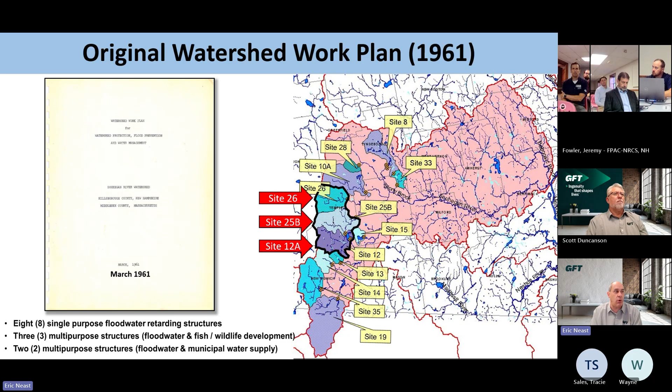Many of these were single purpose dams, meaning they're solely for flood control. But some of the dams have dual purposes, which is both flood control and either wildlife development, or in the case of Site 12A, they also provide that water supply component. If we zoom in a little more, you can see the dams are in the upper end of the watershed, which is typical for NRCS dams.

If we zoom in a bit more on these areas, you get a better sense for where they're located, and maybe located relative to those of you on the call here. All three dams are located in and around the town of Temple, and they're all north of the town of Greenville and east of Route 45.

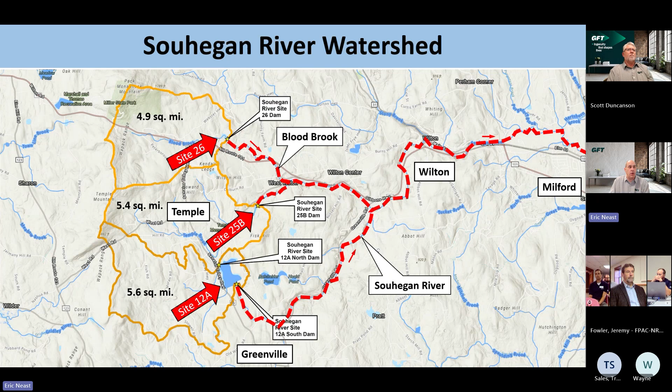These dams are reducing peak flow rates along these reaches of the Souhegan River, so they're providing a great service to the community. Now with that, though, also comes risk, because these dams are sitting there full of water. In the unlikely event that one or more of these dams would fail, there's the potential that the flood wave released from these dams could impact numerous homes and businesses.

With that analysis, this dam then becomes classified as a high hazard dam. Now, the phrase high hazard doesn't mean that the dam is in poor condition. In fact, these dams are very well maintained. The classification of high hazard is solely related to what are the consequences if it were to fail.

And I think this further bolsters my initial comment that public safety is one of the most important parts of this study, because what we're proposing here is to bring these dams into compliance with current dam safety standards, which should reduce the possibility of a dam failure. So I think that's an important thing to realize about what we're trying to accomplish here.

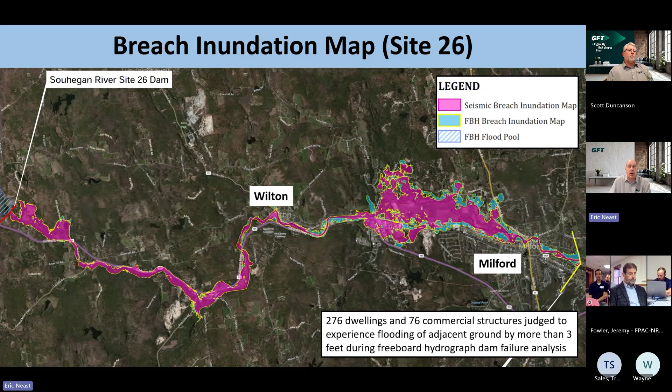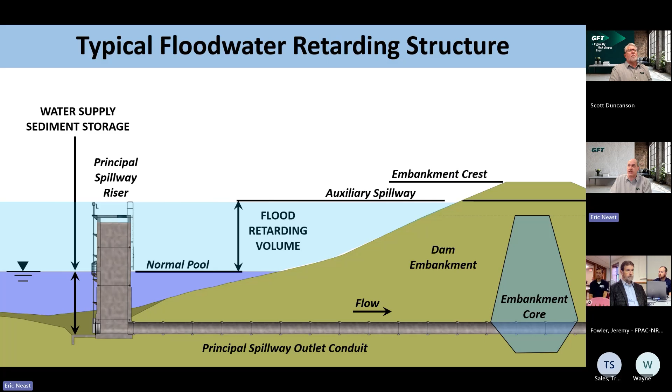So that gives you a little overview of how a typical NRCS dam functions. Next, I'd just like to give you an overview of the dams that we're talking about here today. Just give you a little virtual tour.

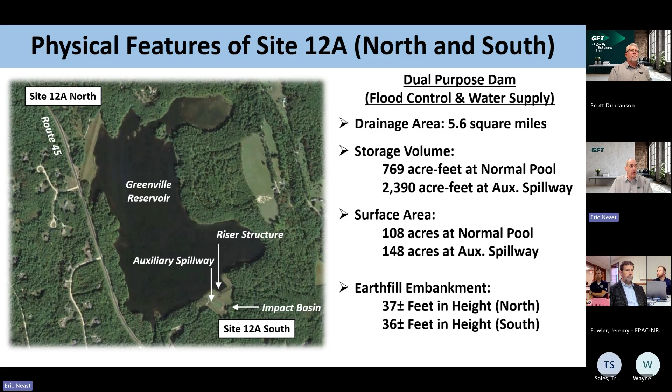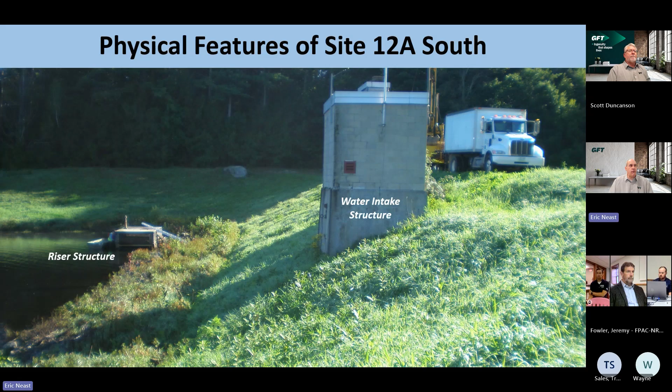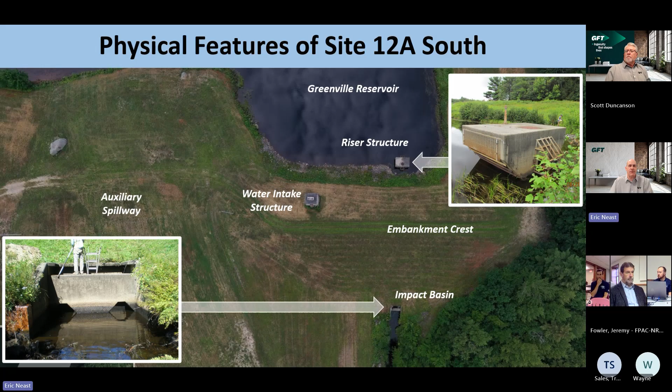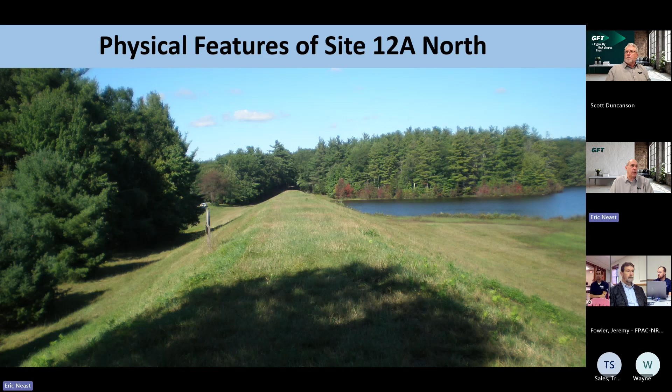Here's an aerial view of this. There is a low-level outlet at this dam that's not used very frequently, but there's the ability to open a valve and activate this low-level pipe if needed, which is the middle pipe in this photo in the bottom left of the screen. You can see Route 45 coming along the bottom right corner of the screen. So that gives you a sense of what the north embankment looks like.

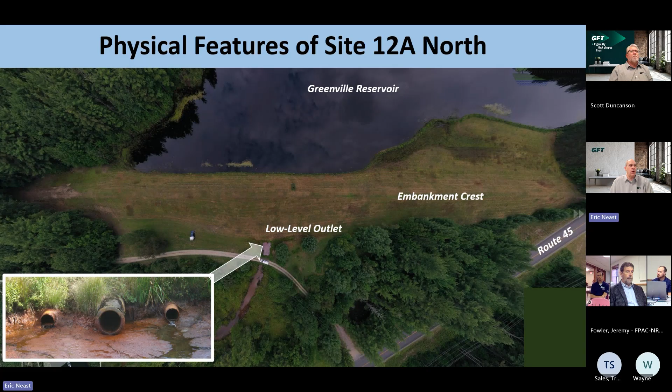If we move over to site 25B, this dam is a little taller, about 64 feet in height, but basically constructed the same way. It's an earth embankment with a riser structure at the upstream toe of the dam, and a pipe that runs through the embankment and discharges into a plunge pool at the downstream toe. Again here, the auxiliary spillway is at the right abutment of the dam.

Again, just an aerial view of Site 25B looking straight down from above. Shows a lot of the same things we just looked at in the last two slides, but this image does show another view of the riser structure and what the outfall of the principal spillway conduit looks like there, where it discharges into the plunge pool.

That plunge pool is there to dissipate energy coming out of the principal spillway conduit, so that when the flow enters the natural stream channel, it's moving at non-erosive velocities.

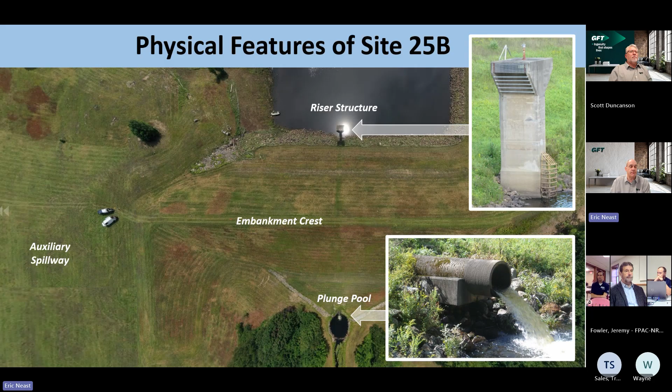Site 26 again looks an awful lot like Site 25B. We have an earthen embankment with a riser structure and a principal spillway pipe that discharges into a plunge pool. The one difference here is that the auxiliary spillway is actually tucked off to the right side of the reservoir. It's not immediately adjacent to the earthen embankment, and I have that labeled here.

I guess the other thing to note is this is the tallest of the dams that we're looking at today. This embankment is about 76 feet in height.

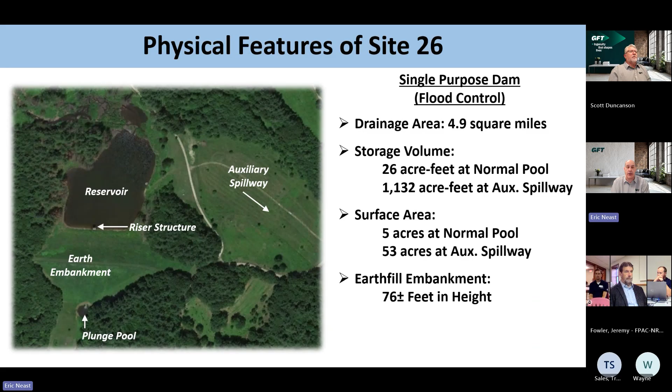Just a view of what that dam looks like from standing on the ground. You're standing at the right abutment of the dam, near the crest of the dam, looking upstream at the reservoir. You can see the riser structure, and that clearing in the background is where the auxiliary spillway channel starts.

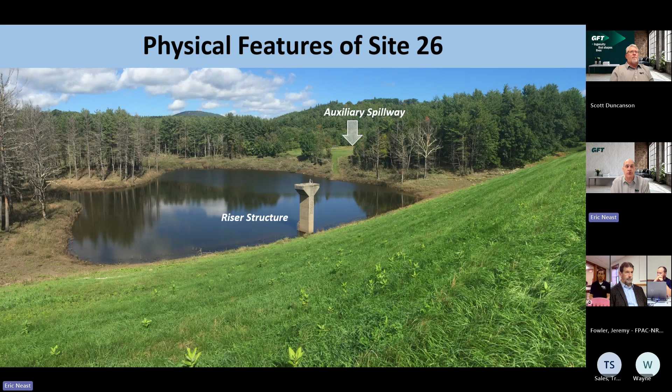And again, another aerial view, just looking straight down at the dam embankment. Another view of the riser and that principal spillway discharging into the plunge pool.

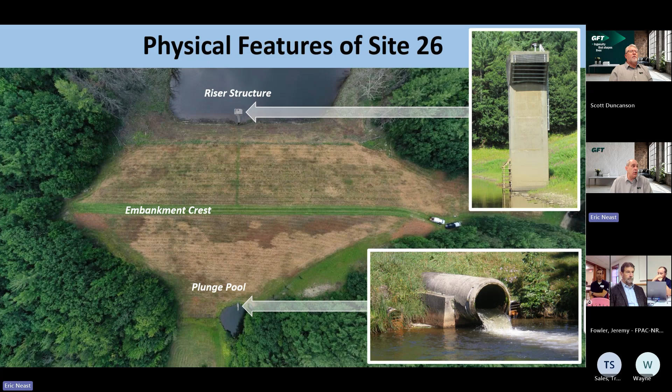So with that, hopefully you have a little better sense of what these dams look like and how big they are. And with that, I'm going to move into what are the deficiencies that we noted with these dams.

Again, I point out that these dams are not in poor condition. It's just that the regulations we need to comply with today have changed since these dams were built. We identified basically 4 deficiencies that are the same for each dam.

Each dam has inadequate conveyance capacity, meaning it's at risk of being overtopped during large storm events. Each dam has auxiliary spillway integrity concerns, meaning the auxiliary spillway is at risk of erosion during those large storm events that activate it.

And then there are concerns with the internal seepage collection and conveyance system and the materials used to construct that system, which may not be compatible with the earth embankment material around them. I'll talk about all of these in much greater detail as we move forward here.

The last concern is that these embankments did not meet the minimum factors of safety that NRCS requires. That does not mean the embankments are not stable, it's just that they do not meet these minimum factors of safety imposed by the various regulatory agencies.

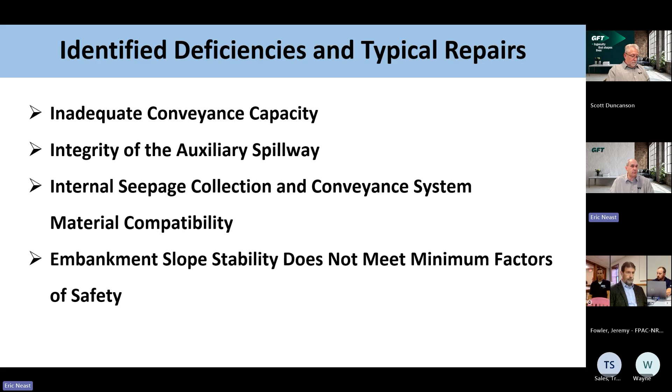So why do we concern ourselves about these? It's interesting, NRCS did a study back in 1983, and this is a little dated now, but it gets the point across. The deficiencies we identified with these dams are probably the top 3 reasons why dams fail, according to this study from 1983.

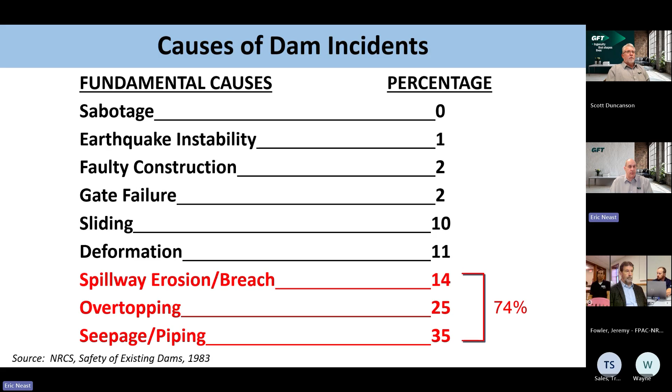We have spillway erosion, embankment overtopping, and seepage and piping concerns, which is that toe drain concern I mentioned earlier. These 3 items added up to 74% of the known dam safety incidents recorded by NRCS back in 1983. So these are well-documented failure modes for earth embankment dams, and it's important that we address these.

Embankment overtopping, probably one of the biggest concerns a dam owner has to deal with. This is a picture of an earth embankment dam being overtopped. Under this situation, the only protection this dam has against failure is the vegetative grass cover on the downstream face of the dam.

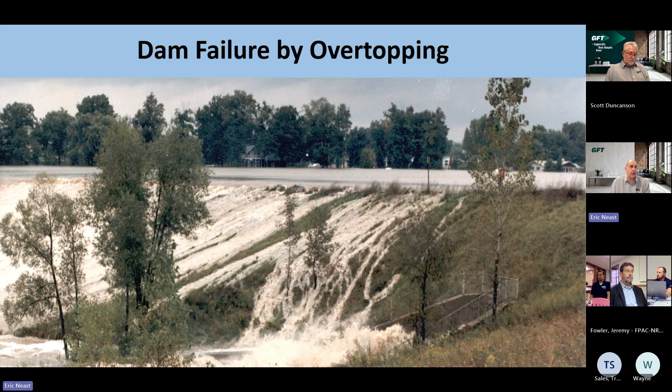While that can be effective under maybe really shallow flows and short durations of overtopping, grass just cannot stand up to long durations of overtopping and high depths of overtopping. The likely outcome of something like this would be a failure of the dam, and that's what happened to that dam I showed you on the picture prior. It actually failed, and the contents of the reservoir were released uncontrolled, causing flooding downstream. So failure by overtopping is a concern.

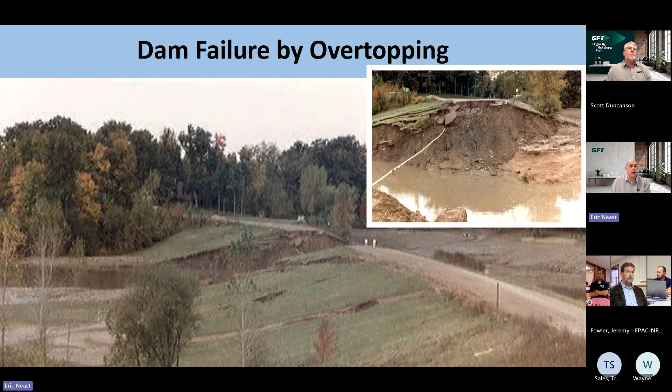ASDSO actually put out a little video of dam overtopping. It's a little cartoonish, but it gets the point across, and I want to show that here next.

I think you might have to reshare with the audio enabled, Eric. Is this not coming through? Not hearing the audio, no. Ah.

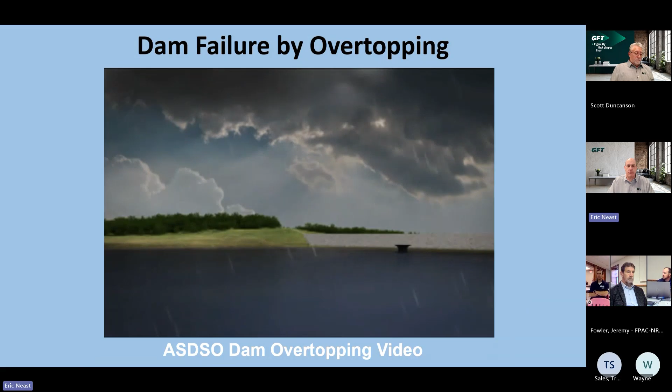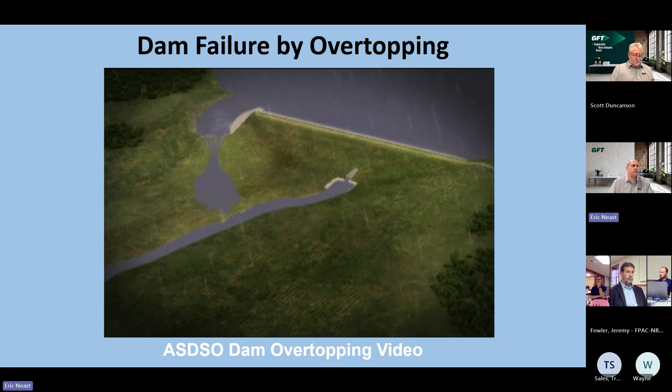Dams are designed to store runoff resulting from heavy rain. When storage has reached a specific limit, spillways are designed to pass the excess floodwaters, initially through a primary spillway. Many dams are equipped with an emergency spillway to help pass large flood inflows which exceed the capacity of the primary spillway. In an extreme flood, flows can exceed the combined spillway capacity, spill over the top of the dam, and create a very dangerous situation.

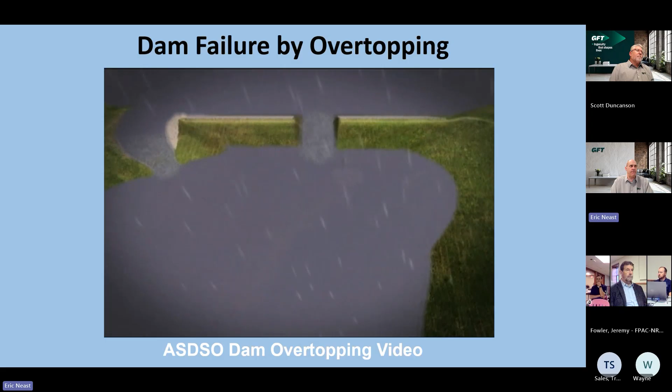Overtopping flood flows can rapidly erode down into an earthen embankment dam, leading to an uncontrolled release of the stored waters and causing catastrophic flooding downstream.

Okay, that was a good little video. So what can we do to increase conveyance capacities at dams? I'm showing you here in the bottom left corner of the screen the Weir equation, and this is your one engineering lesson of the day.

This Weir equation is everything you need to know about increasing conveyance capacity at dams. It involves a factor called Q, the flow you can get through the spillway, a Weir coefficient, which is the C value, the length of the weir, the L value, and the height of the weir, the H value.

The image in the background is actually the auxiliary spillway of site 12A, looking upstream. I have the length and the H shown in this photo. Those are the two values we can play with in the Weir equation to increase conveyance capacity. So if you increase the length of the spillway or the height of the spillway, you can pass more water through it.

We're actually going to do this at both sites 25B and site 26. We're going to slightly increase the top elevation of the dam so that it is not overtopped during these large storm events.

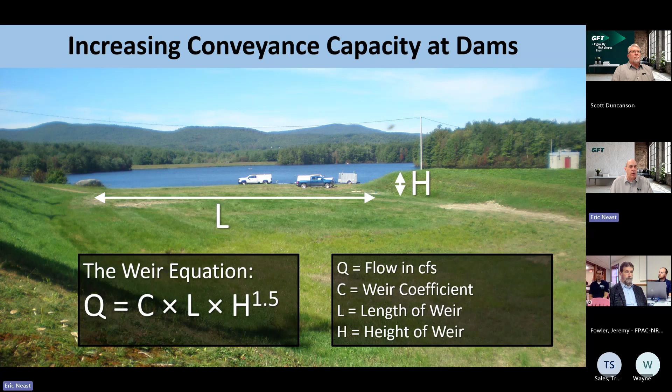Now, if there are restrictions that prevent you from either widening or deepening the spillway, there are other things we can do. This is a project at Rawson Dam in Massachusetts, where the dam owner decided to simply armor the downstream face of the dam with a non-erodible material.

All this concrete you see in the foreground is armoring that was placed on the downstream face of the dam. It creates a shell over the embankment so that when the dam is overtopped, the embankment does not erode, and you don't have that risk of an uncontrolled release of the contents of the reservoir.

This is actually what we're proposing at site 12A South, and I'll get into that in a few more slides. So those are some of our options for increasing conveyance capacity.

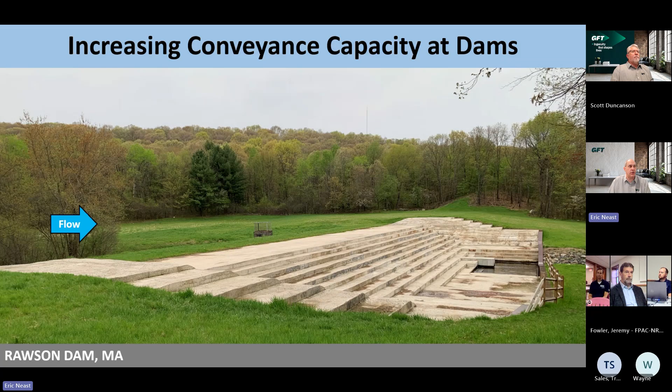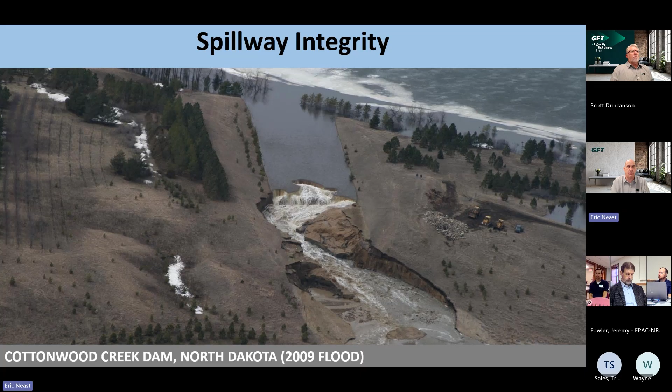If this erosion had been allowed to continue, you would have had a failure of this dam through the auxiliary spillway. To give you a sense of this, here's another photo of that same erosion. That is a 40-foot wall created by the water eroding away the spillway. You can imagine if that erosion was allowed to continue upstream, you would have released a 40-foot wall of water out of the reservoir.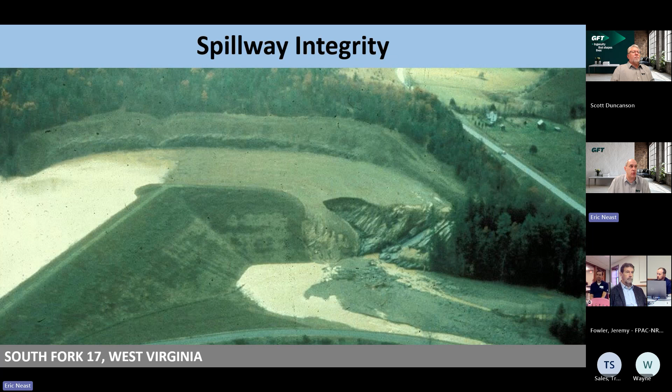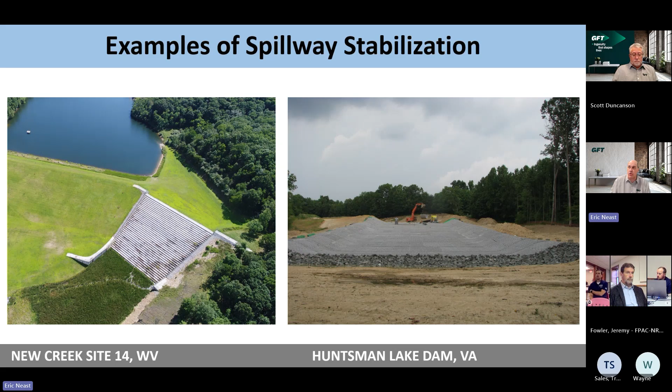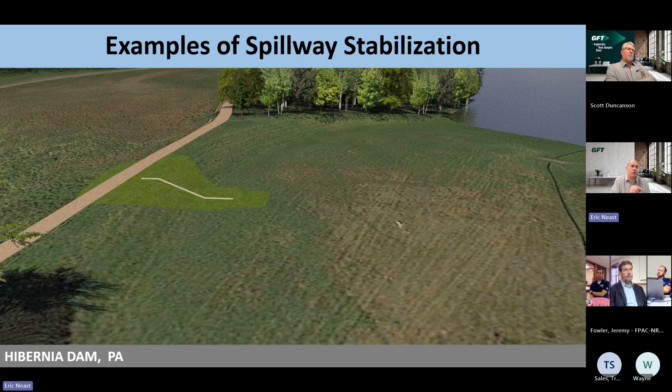And we're actually proposing this concept for site 25B, only the wall will extend across the entire width of the spillway.

Another option, instead of building out of conventional concrete like a concrete wall, you could use roller compacted concrete to create this cutoff wall. Roller compacted concrete is a pretty unique form of concrete - it's very stiff, and once you place it, you can immediately put a roller on it and compact it. So it's not there to be an impervious barrier; it's there to be a structural impediment to this erosion that's moving upstream.

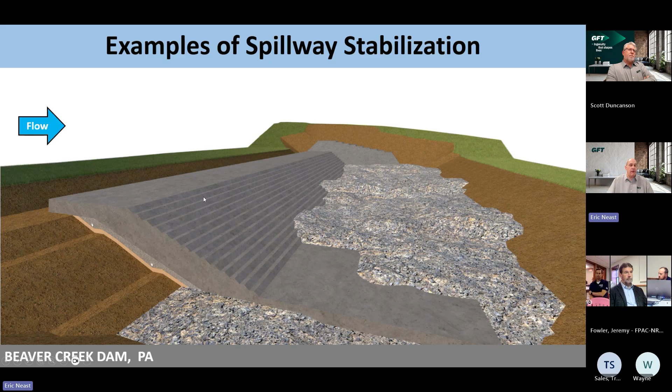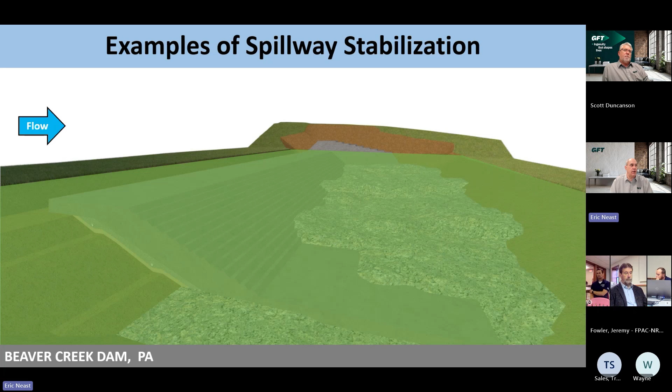So in this artist rendering, imagine you've dug a hole in the middle of the auxiliary spillway and excavated down to the rock, and now you're building back up with this roller compacted concrete material. Eventually all of this will get filled over with soil and seeded, and you wouldn't even know it was there. However, if this spillway would ever start to erode from the downstream side, off the right of this screen, that erosion, when it hit this RCC mass, would stop, and the integrity of the dam would be maintained. We're actually proposing this concept at site 26, in the auxiliary spillway.

The toe drain is probably one of the more important components of this design. It serves a very important purpose: when we have an earth embankment dam impounding water, that water wants to move downstream. It wants to move through this earthen mass, and it will - you will get seepage through this embankment.

As that water moves through the embankment, it creates what we call the phreatic line. Above the phreatic line, the soils are dry, and below it, the soils are wet. With any good dam design, we want to maximize the dry soils and minimize the wet soils, because dry soils have more strength than wet soils. That toe drain helps keep the phreatic line as low as possible in the embankment.

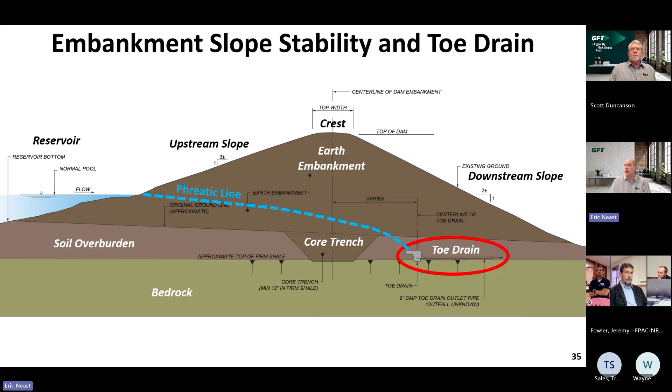And if those particles get into the drain pipe, they can be carried away and removed from the dam entirely. And that's not what we want, because those particles are supposed to be in the dam. And now that they're not, we are creating voids in the dam. If this situation is allowed to occur long enough, you can create a situation we call piping, where you can actually erode a hole through the embankment without even knowing it. So having a properly designed toe drain is important.

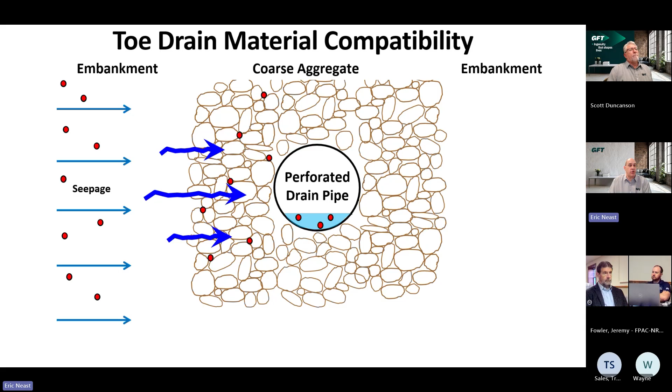Now, under today's standards, we typically require what we call a dual aggregate toe drain. And that is very similar to what was constructed in the 1960s. We still have the perforated pipe and the coarse aggregate around the pipe, but now we add a sand filter, a very fine material around the coarse aggregate that separates the embankment material from that coarse aggregate.

And with this, that sand is designed so that those little particles that the seepage is carrying with it do not make their way through the sand. But here, all those particles are captured by the sand so that they remain inside the dam embankment where they belong.

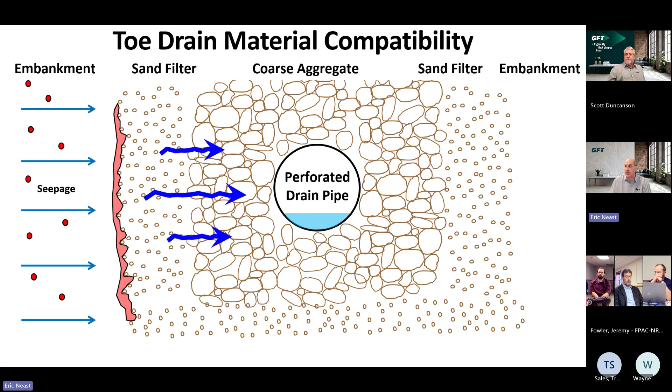And this is a situation that we need to resolve here at all three of these dams. These dams have the old style toe drain, and we need to bring them up to current design standards. That can be done by simply abandoning the old toe drain and then adding a new dual aggregate toe drain at the downstream toe of the dam. And that's what you kind of see here on this screen.

So in doing so, we solve two problems. We solve the material compatibility of the toe drain, and we also solve the factor of safety issue with the downstream embankment slope.

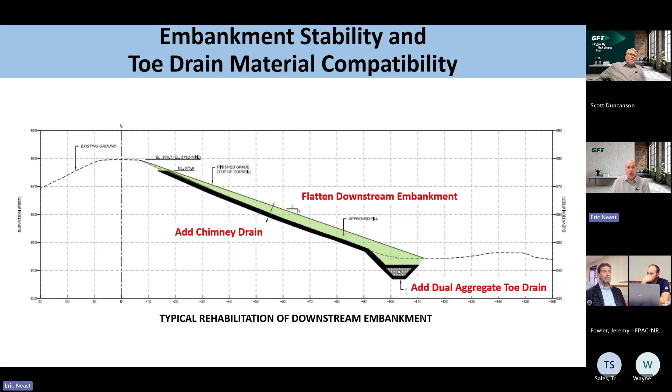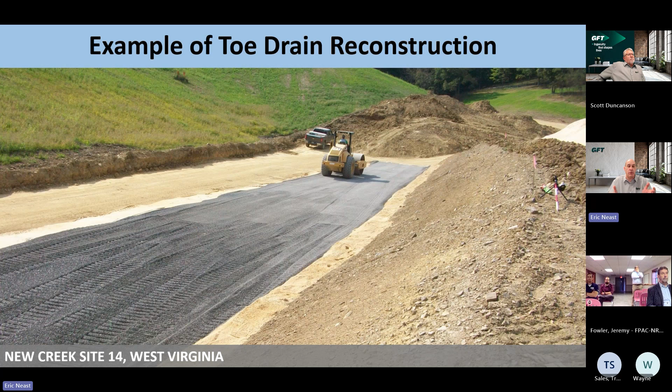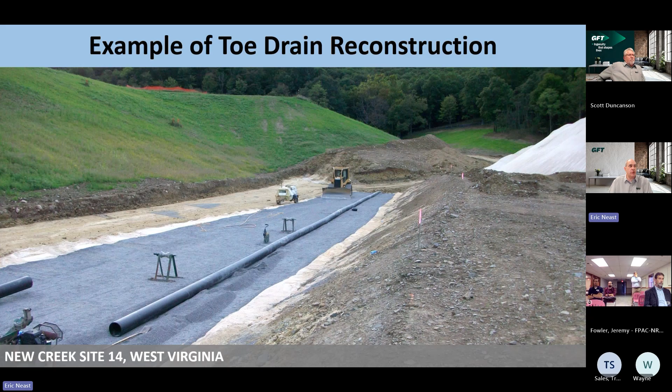In this slide, he's installed the bottom layer of sand, and then placed the first course of coarse aggregate in the middle. That's what the roller is sitting on right now, the coarse aggregate. You can see the sand, the lighter colored material just outside of the coarse aggregate. Then that perforated drain pipe was placed, and covered with more coarse aggregate, and then that coarse aggregate was covered with more sand.

And that's how this chimney drain would be built, and what the typical construction might look like to install something like this.

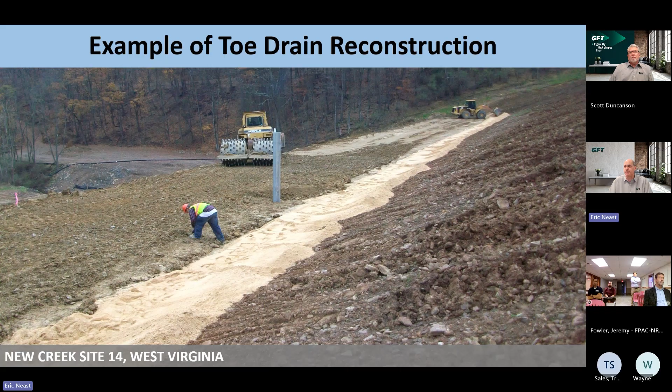So with that, I've gone over the deficiencies and typical solutions that some other dam owners have used to solve those same problems. Now I just want to quickly look at how those solutions apply to our project.

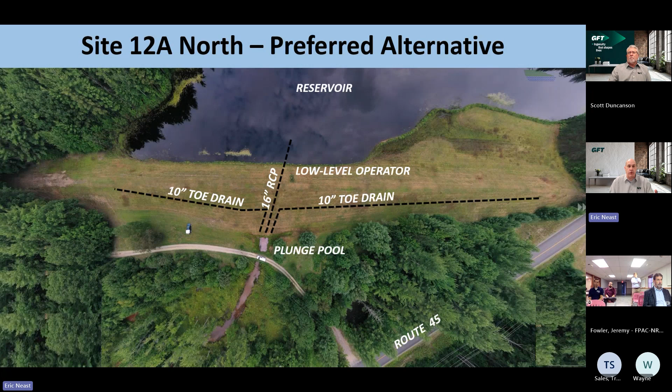We're going to start with site 12A, and again we'll start with the North Dam. This is an aerial view looking down at the dam, which we've seen before. What we'll propose here is flattening the downstream embankment slope and installing a new toe drain.

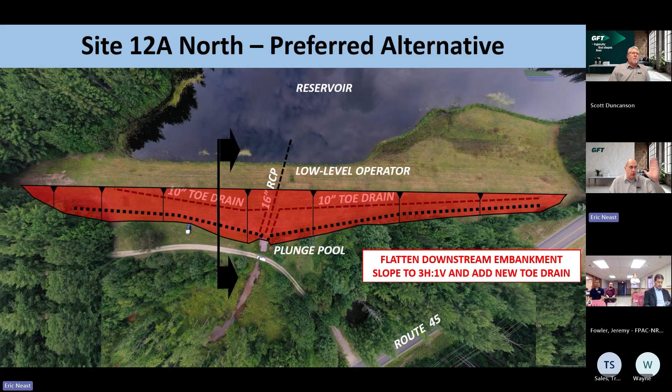Everything in red represents new fill that we'll be adding to flatten that embankment slope. If we look at a cross section, basically saw cut this dam in half and look at it from the side, it'll look something like this.

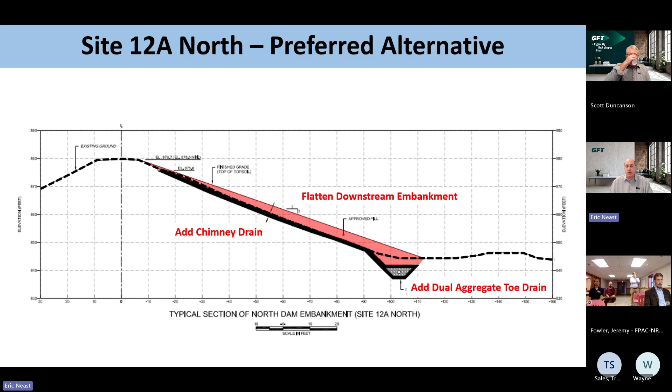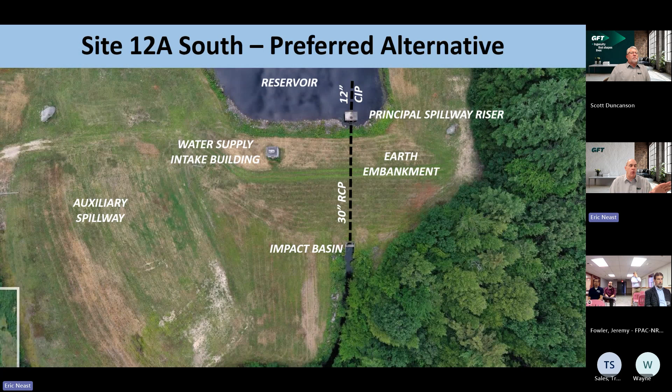If we move over to the site 12A South embankment, our proposed solution here is to take the crest of the dam and lower it to the same elevation as the auxiliary spillway, and then add our roller compacted concrete armoring to the downstream face of the dam.

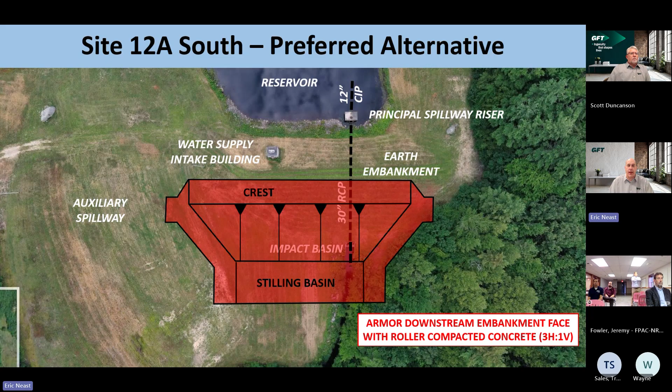In doing so, what we're saying is this becomes our new spillway. If we get a big storm event, water will just flow over this RCC embankment and enter the stilling basin, then continue on downstream safely without compromising the integrity of the embankment. We'll then backfill the auxiliary spillway because it's no longer needed, so flow will not go through the existing auxiliary spillway when we're done.

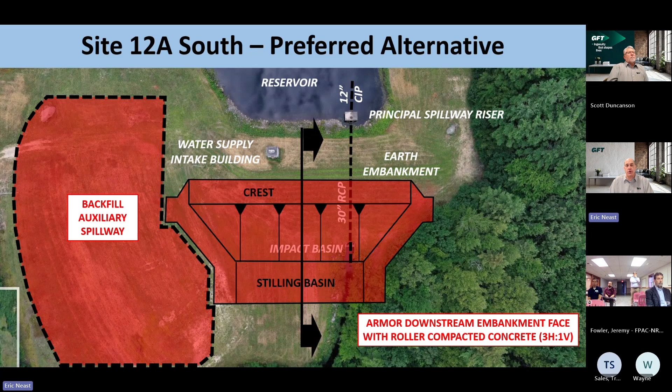Again, if we take a cross section through the center of the embankment here to show this RCC fill, it kind of looks like this. There's a lot of lines on this image, but basically the red is the new roller compacted concrete.

The dark dashed black line is the existing ground surface. You can see our new roller compacted concrete actually goes below the existing ground surface at the downstream toe. But for the most part, the RCC is placed within the existing limits of the embankment.

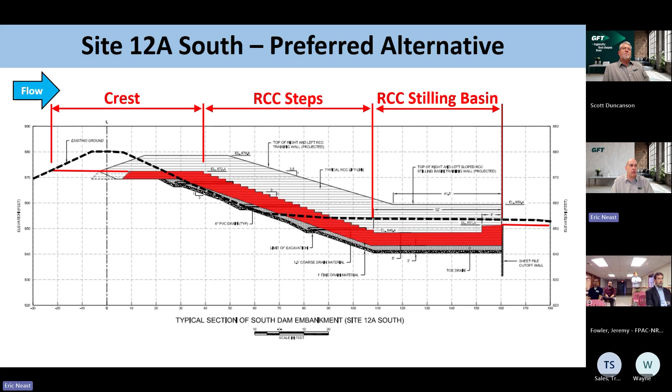Then under the RCC, we have that dual aggregate system again. We have the coarse aggregate directly under the RCC, and under the coarse aggregate is our fine aggregate, the sand, so that any seepage coming through this embankment will be filtered.

I can show you an example of something very similar that was done at Upper Deckers Site 1 in West Virginia. You're looking upstream at a dam that's a little taller than Site 12A, maybe consistent with something like Site 26. But this dam had the same problems: it had inadequate spillway capacity, and it had an auxiliary spillway that was at risk of eroding.

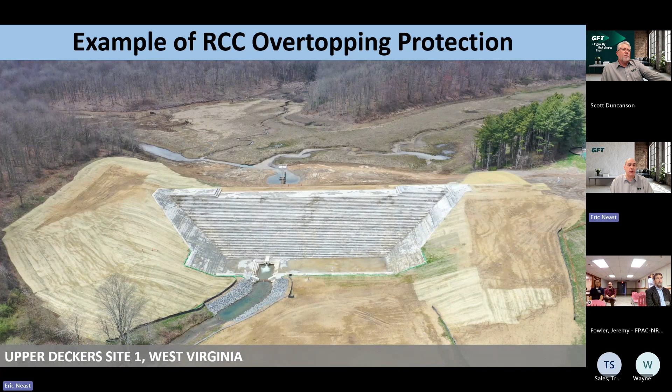And we did the same thing. We armored the entire downstream face with our roller compacted concrete, and then filled in the auxiliary spillway on the right-hand side of the dam.

If you take a little closer look at this from the side, this shows you what some of the roller compacted concrete looks like. It's typically placed in lifts, 1-foot lifts, and we create a stepped pattern here. That step pattern helps dissipate energy as water flows down over this. We also include a stilling basin, on the right side of this photograph, to help dissipate the energy of all that water coming down these steps and allow it to discharge into the receiving creek at non-erosive velocities.

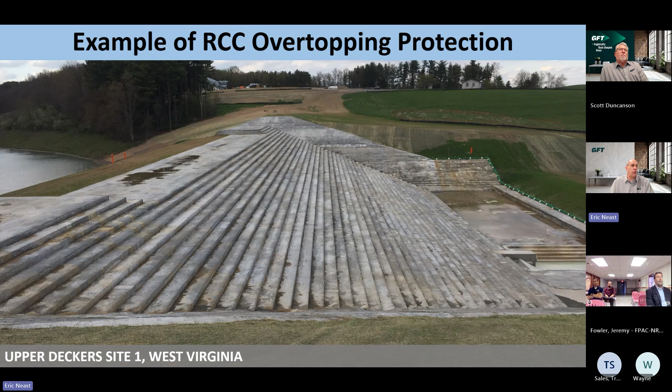Now at Site 12A, we're proposing something a little bit in addition to this: we're going to cover these RCC steps with 2 feet of topsoil and then seed it. So when we're done, it'll look very similar to the way it looks now, and that is to address cultural resources concerns. So that's one caveat from this picture that's a little different for what we're proposing at site 12A.

Now, also at site 12A, NRCS would like to modify this structure so that it can provide a release pulse during extreme drought conditions.

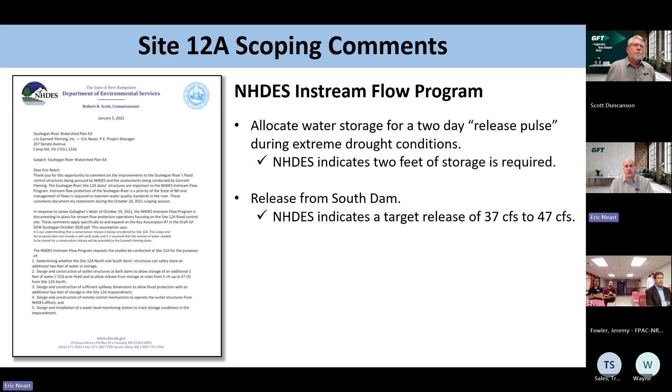When in extreme drought conditions, the Souhegan River flow can get very low and the water quality in the river becomes very poor. So it would be helpful during those times if you could release a slug of water downstream to help improve the aquatic habitat that lives in the river. The goal here is to have a release for a 2-day period that releases between 37 and 47 CFS from this dam.

Going back to this original picture of how an NRCS dam works, we can kind of steal 2 feet of storage from that flood retarding volume and use it for this release pulse. So essentially what we're going to do is raise the normal pool by 2 feet by adding a stop log structure in front of the orifices that set the normal pool. The concern might be: does the dam still function properly if you take away 2 feet of the flood retarding volume? We analyzed that, and we found that the 100-year storm is retained below the auxiliary spillway, which is what we want. So we feel this is a viable option.

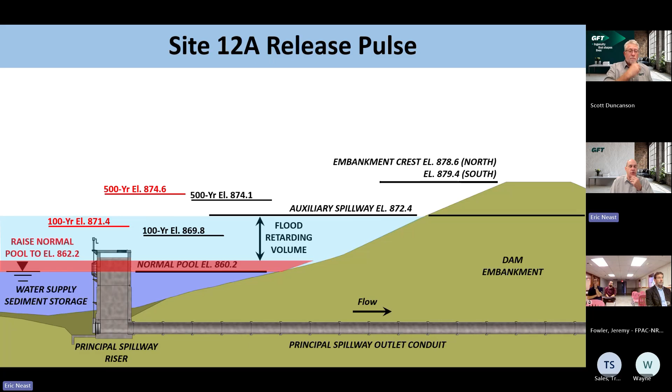How we'll raise normal pool is in front of those orifices that set the normal pool on the riser structure. There are 2 of those orifices, one on the upstream face of the riser and one on the downstream face. We'll construct this metal structure that will accept stop logs, and when we place the stop logs in this structure, we'll essentially raise the normal pool to the top of the stop logs. That'll be the normal operating condition of this reservoir until you have an extreme drought and you need to release water. In that case, you can simply pull out the stop logs and create the release you need downstream.

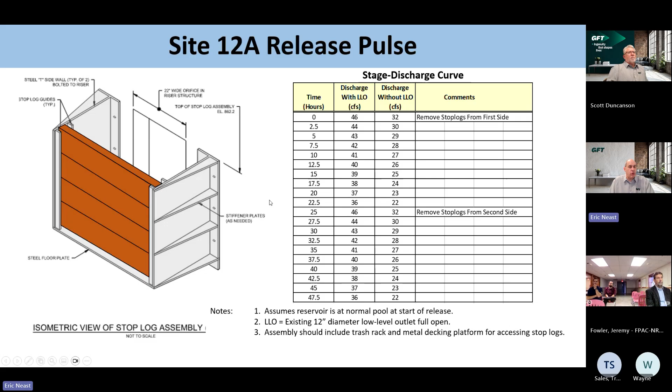Those are the improvements that are being proposed as a preferred alternative at site 12A.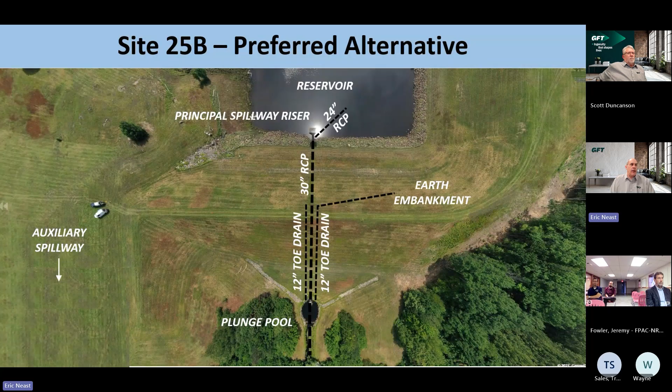At site 25B, the proposed improvements look like this. Again, we're looking down from an aerial view onto the dam, and our proposed improvements are what just showed up here in red. We're proposing to raise the top of dam ever so slightly, about 0.7 of a foot, and that really just involves filling in some low areas. So it's really a very minor raise.

We'll also flatten the downstream embankment slope to a 3-to-1 slope and add those toe drains like we talked about before. At this dam, we're also proposing to replace the riser structure because it was found to not be stable under seismic conditions. So the new riser structure will look just like the old one, only it'll have a larger base at the bottom so that it will remain stable during a seismic event.

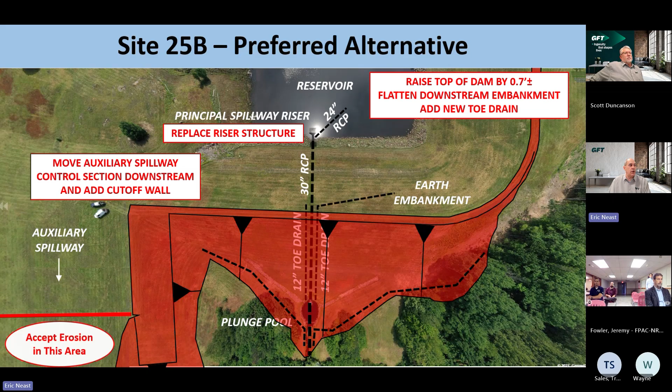In the auxiliary spillway, we're proposing to move the auxiliary spillway crest downstream and add a cutoff wall. I've touched on this earlier with that dam at Hibernia, and I'll show you a cross section coming up of what we're proposing at site 25B. With that auxiliary spillway option of adding a cutoff wall downstream, we're basically saying we're going to accept some damage to the spillway if we get that huge storm event. We might get erosion in that area, but above the cutoff wall, the spillway is going to remain intact and the dam will not be compromised by spillway erosion.

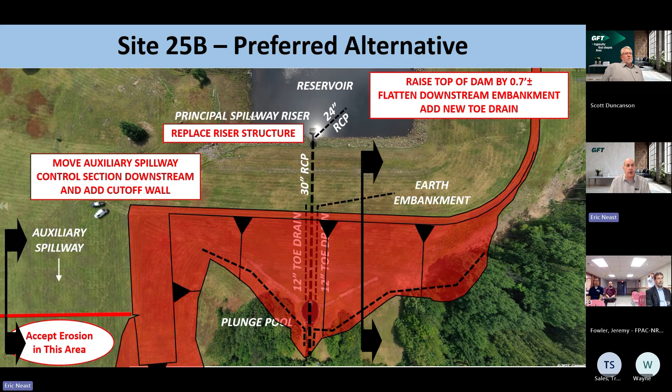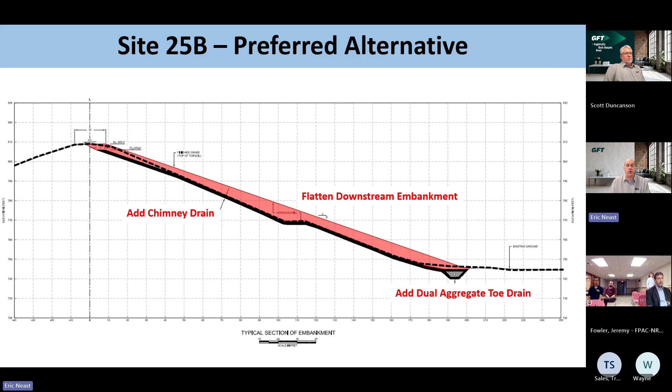So if we look at a couple of cross sections, we'll look at one through the embankment and then one through the auxiliary spillway. This is a cross section through the embankment, and it looks very similar to what we talked about previously. We're going to strip off the topsoil, add our chimney drain and our dual aggregate toe drain at the downstream toe of the dam, and then flatten the downstream slope to a 3-to-1 to improve embankment stability.

At site 26, again, a lot of the same things.

This is an aerial view of the embankment. Our proposed improvements here are just raising the top of the dam ever so slightly by about 0.4 of a foot, which again is really just filling in low areas on the crest of the dam, flattening the downstream embankment, and adding our new toe drain.

The cross section through this dam would look almost identical to what I've shared with you on the past 2 dams, so I don't have that cross section, but I will mention that we will be replacing the riser structure here for the same reasons as at site 25B.

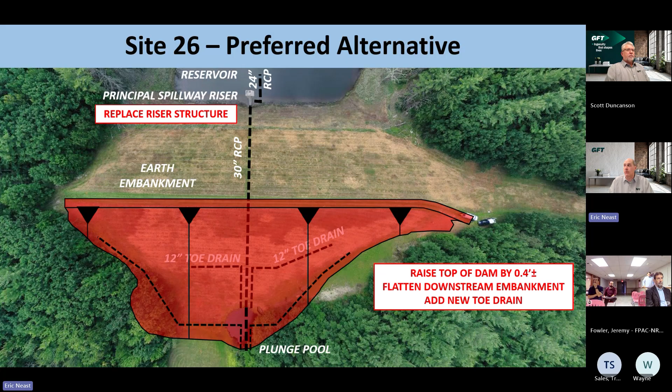The slight difference here at site 26 is how we address the spillway erosion in the auxiliary spillway. This is an aerial view of the auxiliary spillway. You're looking downstream through the auxiliary spillway. The reservoir is there on the bottom of the screen, and the dam would actually be on the right, to the right of this image.

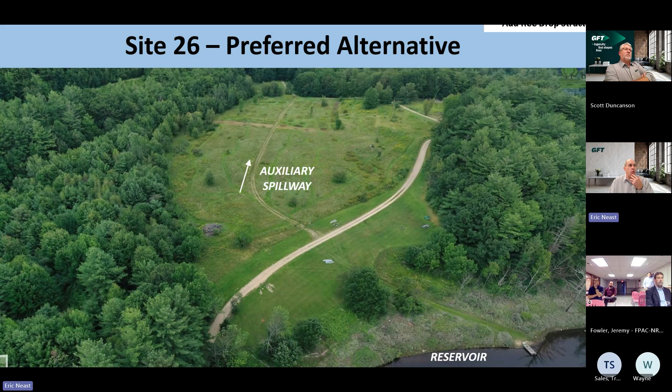What we're proposing there is an RCC cutoff wall in the auxiliary spillway. In this case, it would look something like this. We would need to excavate down a hole in the auxiliary spillway down to good competent bedrock, and from there build our roller compacted concrete structure up in lifts. The top lift would be maybe a foot below our finished grade, and then we would backfill this whole area with soil. When we're done, you wouldn't even know it was there. If you walked over top of it, you wouldn't even know it.

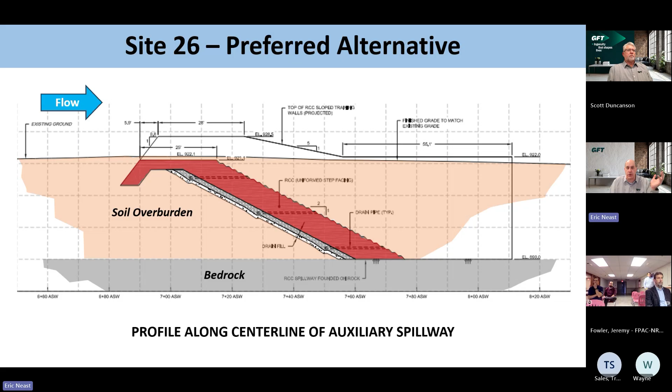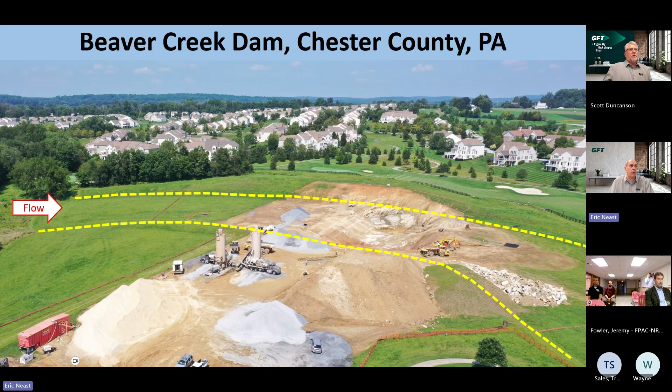In this photo, the contractor has already excavated the spillway down to bedrock, which is where some of these pieces of equipment are. Then, once you were down to bedrock, you can start building up these RCC layers. In this photo, several of the first layers are already in place. You can see the RCC, which is this lighter gray color, which this roller is sitting on.

To the left of that roller is this slope, and this is the coarse aggregate that goes directly under the roller compacted concrete. Under that is the fine aggregate, which you can barely see here on the very left side of the screen. So this is the same type of construction that we've talked about already.

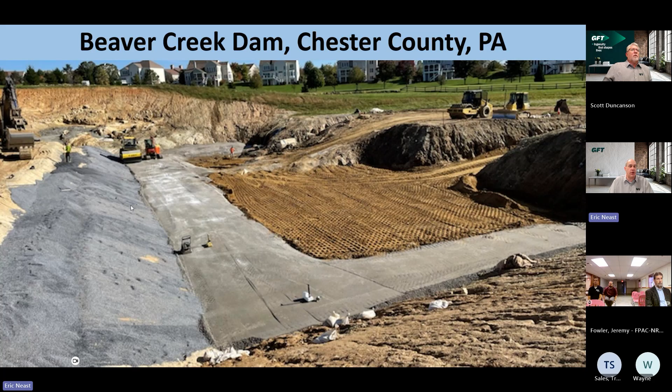Just a few more photos showing the roller compacted concrete lifts being brought up to grade. An aerial view looking down. In this case, the flow in the spillway is from the bottom of the screen to the top of the screen.